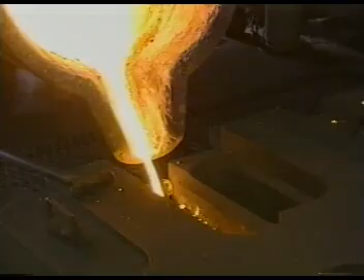Such traditional industries as foundries, tree plant nurseries and landscaping services, and making fishing poles have made Kawaguchi a well-known city since olden times. Because of the extensive foundry industry here, Kawaguchi has been known as the City of Cupolas, and has often appeared in movies introducing famous towns.

As newcomers to the city increase, the traditional festivals and ceremonies flourish more and more. The first festival of the year is the Hatsu-Uma Drum Festival in March.

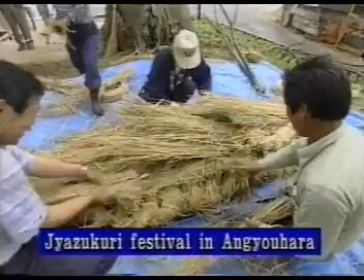May is the season for talismans and praying for abundant crops, and a large snake is made of straw for the Jyazukuri Festival. August brings the Tatara Festival, the largest festival held in the city. Then, in December, comes the Okame Festival, a year-end event much loved by the local people.

In February 2003, Skip City Center was born as a new industrial and business center. This multimedia facility has brought many changes to Kawaguchi, but the old is being carefully retained in a harmonious way, attracting people to this city of tradition and advanced technology.

However, even greater increases in population are forecast for Kawaguchi in the future, and the amount of waste generated will also continue to increase. Strenuous efforts are being made to cope with this situation. All residents wish to have a safe, pleasant, lively city in which to reside without damaging the natural beauty.

To make this widely held desire a reality, in November 2002, the Asahi Clean Center, a new community-friendly waste thermal treatment facility, was completed. The Asahi Clean Center not only keeps the load on the environment down, but also recovers valuable resources from waste.

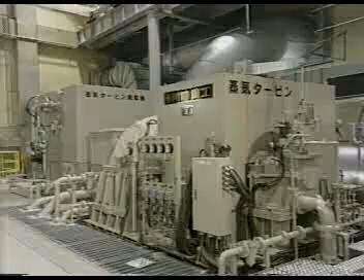Municipal solid waste is largely classified into 4 categories: paper, bottles, cans, PET containers, and similar items that can be reused; various kinds of organic waste and other unrecyclable waste; batteries, fluorescent lamps, and other hazardous wastes; and large furniture, bedding, home electric appliances, and similar items.

Inside the Asahi Clean Center are located the Recycle Plaza for processing recyclable waste and the gasification and ash melting facility to dispose of household waste.

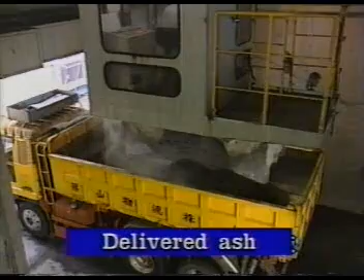This is ash that remains after household waste is incinerated at the Totsuka Clean Center and is called delivered ash. The Asahi Clean Center disposes of delivered ash. 420 tons of waste and 37 tons of delivered ash can be disposed of per day.

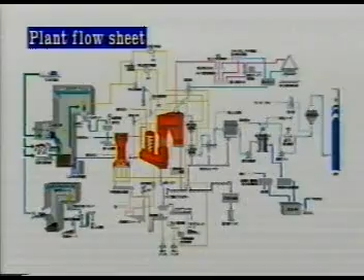Now, let's take a look at the gasification and ash melting facility and various other typical facilities. The waste thermal treatment facility consists of the following 4 major areas.

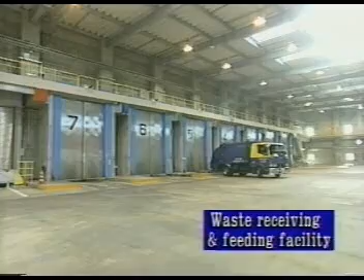First is the waste receiving and feeding facility, which receives, stores, and pulverizes waste, and feeds it with ash to the fluidized bed gasifier at a constant rate.

Next, the gasification and ash melting facility. The gasifier converts waste into combustible gas, and the gas melts fly ash.

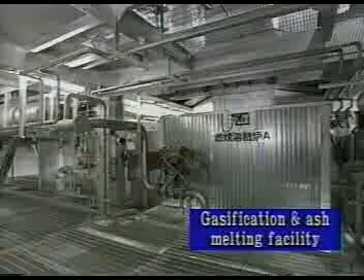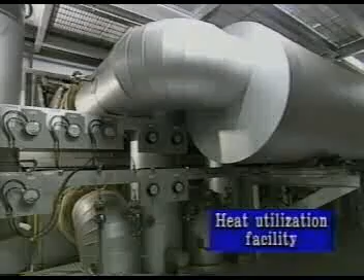Third, the heat utilization facility that recovers heat energy from flue gas, reduces emission temperature, and generates steam. Finally, the flue gas treatment facility eliminates hazardous substances from the flue gas.

Now, let's look at each facility in detail.

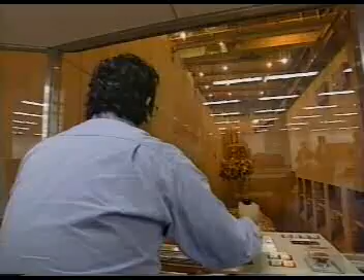The collected waste is weighed at the weighing shed and then loaded into the waste pit from the platform. Then, waste is further lifted by a crane into a waste hopper.

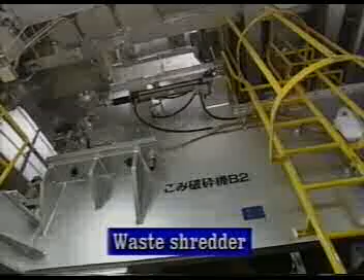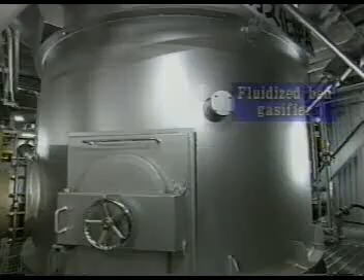Waste in the hopper is fed into the shredder, where it is broken up into fine pieces, which are then mixed with delivered ash and fed by the waste feeder into the fluidized bed gasifier and ash melter at a constant rate. In the gasifier, the sand is fluidized in a vertically circulating motion with high temperature to decompose the organic substances contained in the waste.

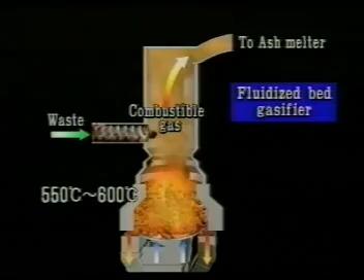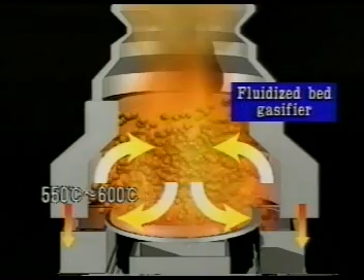Waste fed into the gasifier by the waste feeder is brought into contact with a high-temperature fluidized sand bed and is decomposed into gas, char, and other substances. The gasifier is kept at 550 to 600 degrees Celsius, which is low enough to prevent dioxin formation, and which is also below the melting point of ferrous and aluminum.

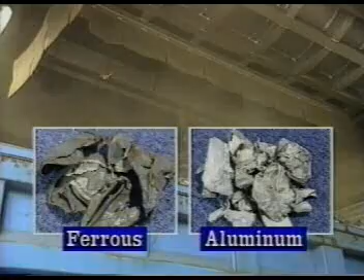The gasifier interior is maintained in a reductive and lean oxygen state. This makes it possible to recover ferrous and aluminum and other inert substances from the bottom of the gasifier without oxidation.

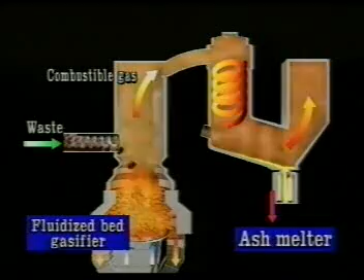The gas from the fluidized bed gasifier is led into the ash melter, where it is combusted at a low air ratio to reach temperatures as high as 1,350 degrees Celsius to melt the ash into vitreous slag. The ash melter consists of...

The primary chamber, inside which the ash entrained with gas is collected on the chamber wall by cyclonic motion. The incline-type chamber for collecting slag in the secondary chamber. And the ash melter also has a tertiary chamber for the complete combustion of gas.

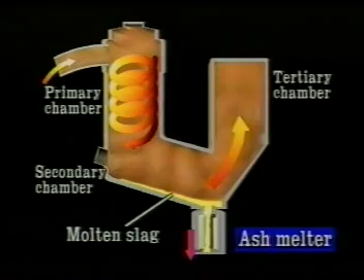Gas whirls along the ash melter wall while burning at 1,350 degrees Celsius. Ash in the gas is melted into molten slag due to the high temperature and with the centrifugal force of swirling gas. The slag then runs down the wall of the ash melter.

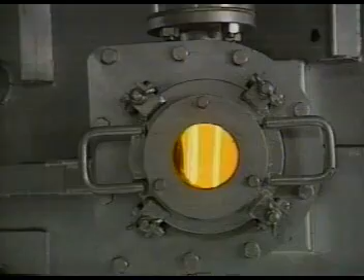Molten slag is quenched by water and air through the granulation trough and the slag conveyor, and is pulverized and collected through the slag grain size controller.

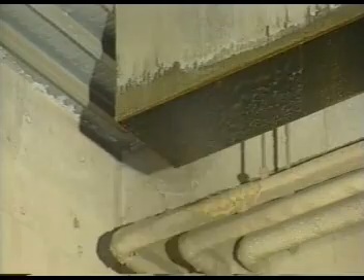The recovered slag can be used as a substitute for sand as a sub-base course material for road construction. At the Asahi Clean Center, slag-made bricks, tiles, and interlocking blocks are used for flower beds, stairways, and sidewalks.

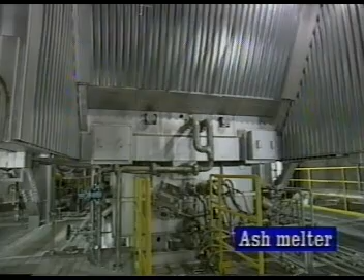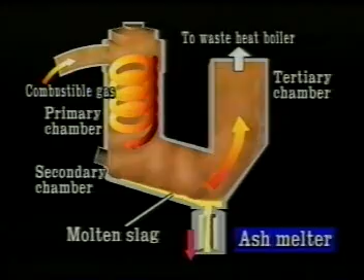The gas, stripped of slag, is completely combusted at 1,350 degrees Celsius. The waste heat boiler effectively recovers heat energy involved in the flue gas and utilizes the heat to generate steam. The temperature of the flue gas at the inlet of the waste heat boiler is higher than 1,200 degrees Celsius.

The generated steam is utilized for the center steam turbine to generate electricity. The electricity reaches a maximum of 12,000 kilowatts, enough for consumption in the entire center. Surplus electricity is sold to electric power companies.

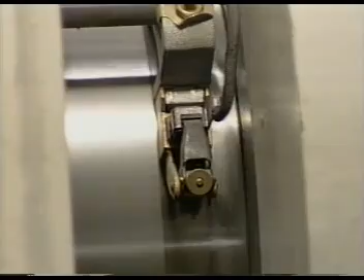The flue gas is sent to the treatment facility for removal of pollutants. The steam is also used for water boilers to feed hot water throughout the center.

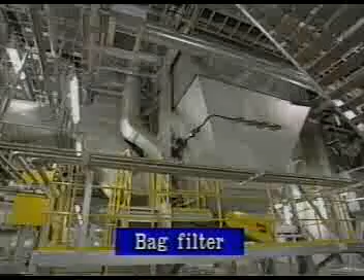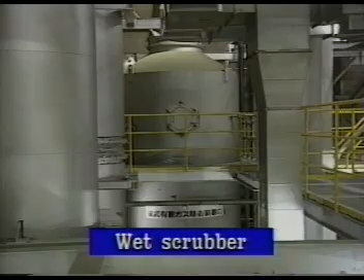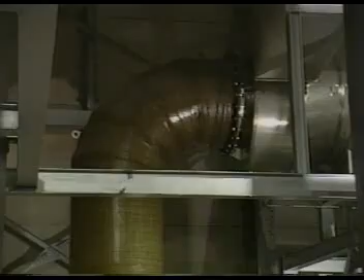The bag filter collects dust in the flue gas. The flue gas is scrubbed with a solution of caustic soda to remove sulfur oxides and hydrogen chloride. Then, the flue gas enters the catalytic reaction column where nitrogen oxides are reduced to nitrogen by ammonia.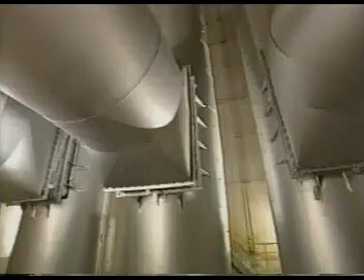The pollutants contained in the flue gas are removed to a level below the limit specified by the emission guidelines and can be released safely into the atmosphere from a 100-meter stack.

This graph shows a comparison of the emission levels of pollutants and the regulatory limits. As can be seen from the graph, the emissions controlled at the Asahi Clean Center, shown in blue, are well below the regulatory maximum limits, shown in red, permitted.

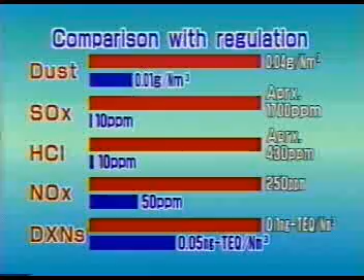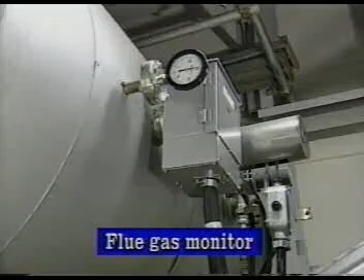The emissions are under the continuous watch of a flue gas monitor installed in the stack. The quality of emissions monitored is indicated on the emission quality display at the entrance of the recycle plaza.

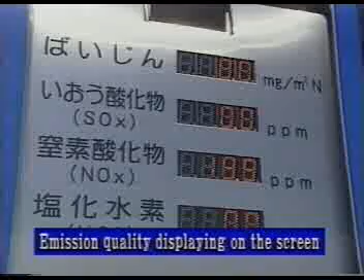The representative installations of the Asahi Clean Center just mentioned are put under the control of the central control room. Signals from cameras and measuring instruments are all gathered here.

Let's review the major merits and the latest technology of the Asahi Clean Center's gasification and ash melting facility.

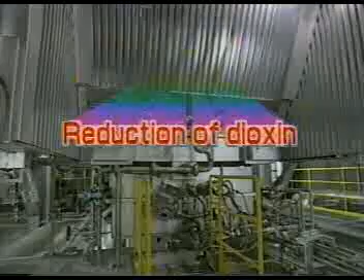The high temperature treatment dramatically reduces dioxin. Ferrous and aluminum are recovered in a non-oxidized state suitable for reuse. By reducing air ratio, the flue gas volume is reduced to minimize environmental loads.

Fly ash is melted and becomes slag by the heat energy contained in the waste. The recovered slag is used as a material for sidewalk blocks and other like products.

Unsorted waste is a nuisance, but when it is sorted properly, as shown here, recycling becomes possible, and it becomes a resource.

It is very important, of course, to sort waste properly, but the most important thing is to reduce the amount of waste generated as much as possible by creative thinking and effort.

The daily average discharge of waste per person is about 1 kilogram. Soon, the population of Kawaguchi City will reach 500,000. This means that 500 tons of waste will be generated every day.

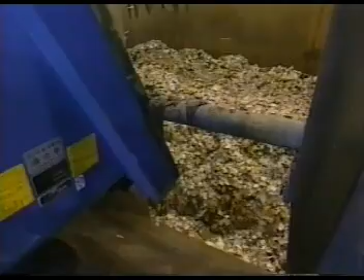Waste disposal is a costly business. The Kawaguchi municipal government is attempting to decrease the amount of waste generated by 100 grams per person per day through the cooperation of all residents.

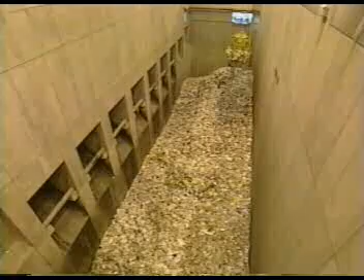If this can be achieved, it would result in reducing the amount of waste that must be disposed of by 18,000 tons a year. The Kawaguchi municipal government is striving to create a city filled with greenery and provide a pleasant living environment.

If each and every citizen cooperates in reducing waste, the result will contribute significantly to the city's efforts to build a more comfortable place to live for all residents.